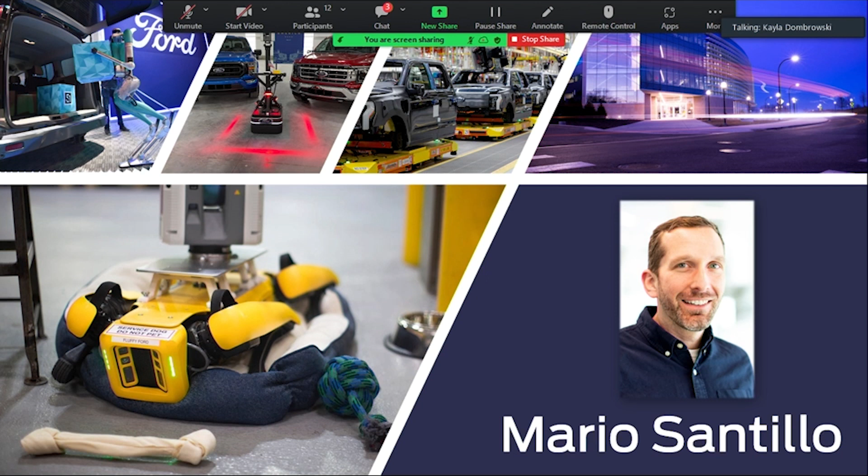All right, thanks everybody, and welcome, very happy to be here. So as was said, I'm Mario Santillo. I work for Ford Motor Company, and I actually lead a lot of their robotics research. I've been doing that for the last 4 years, but that's not at all how I got here, was not robotics.

When I was an undergraduate, I actually went to undergraduate at Rensselaer Polytechnic Institute, or RPI. If anybody knows, that's upstate New York, much smaller school than U of M. But I did aeronautical and mechanical engineering, because you couldn't actually have just an aeronautical or aerospace engineering degree at the time.

That actually led me to do some internships and co-ops with Boeing out in Southern California, where I learned a lot about spacecraft guidance, navigation, and control. That was really my first introduction to what controls is. I did 2 co-ops and 1 internship with Boeing over a series of several summers, and I realized I had no idea what I was doing there, but I figured I could actually do it really well anyway. It wasn't until the 3rd summer, after my senior year of undergrad and before I started here at U of M, that I realized how my teaching in undergrad actually led to what I was doing as essentially a full-time job at Boeing. That really led to a lifelong passion for controls.

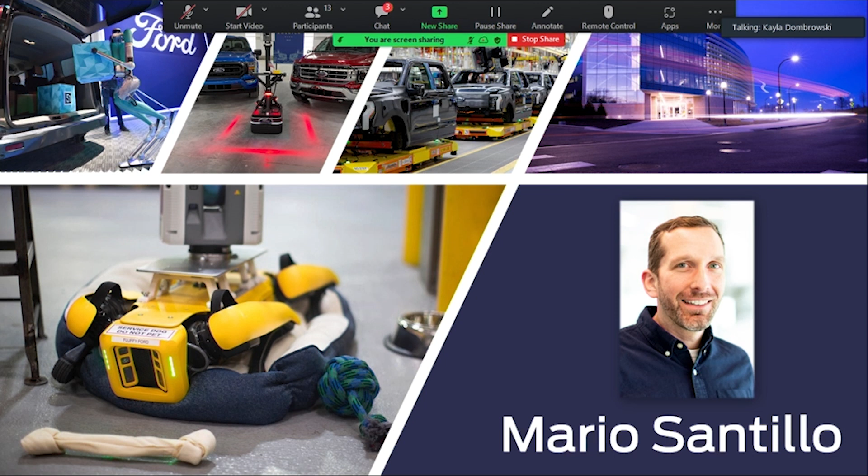This could be cameras and LiDARs and a bunch of other things, like ultrasonics and different types of cameras. And processing that data through a perception system to essentially understand the world we live in. And then we want to use that to achieve some objective.

We want to plan a path. Are we moving a robot, like a robotic arm, in many degrees of freedom? Are we moving a mobile robot? Do we have obstacles to avoid? How do we actually plan the path? And then the controls, which is where my original discipline was in, is how do we execute that, and how do we do it robustly and make sure the robot doesn't fall over and do weird things?

Obviously there's a huge interaction with human interaction. So human-robot interaction is a primary piece, because when we think about manufacturing facilities, it's great to have robots caged off, but they take up a lot of space and it's hard to reconfigure them. We want to get humans operating very closely with robots, and that means we need to really understand well what's around us, because robots could be extremely harmful if they met you in the wrong situation.

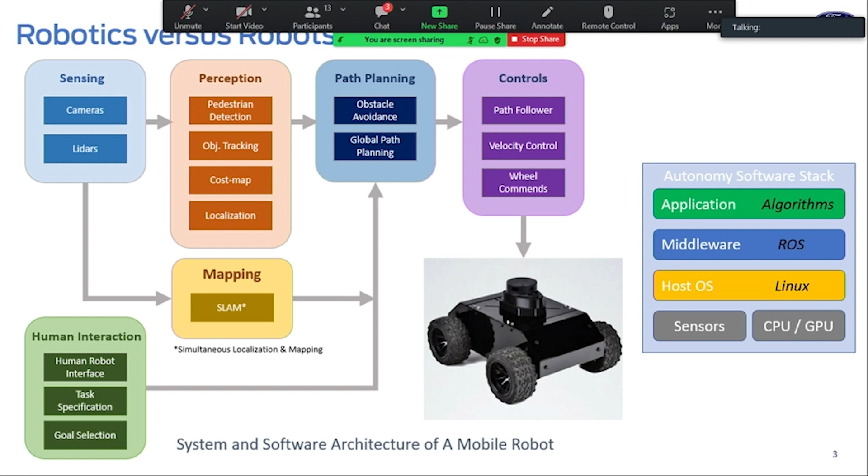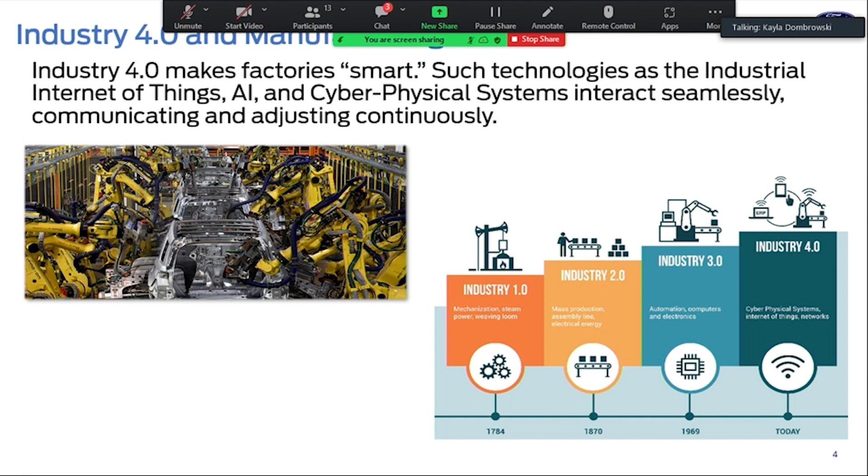So pivoting a little bit into manufacturing, I wanted to talk about what you may have heard called Industry 4.0. In the most basic sense, it's really just trying to make a factory smart. So they have this industrial Internet of Things, which is essentially just a smart word for a very expensive sensor, artificial intelligence, cyber physical systems - that's like augmented reality, virtual reality, digital twins of systems. And you want to get these all connected together.

So this is a huge system integration exercise, but the whole purpose is really this no-surprises manufacturing. In manufacturing, you don't want surprises because it costs downtime, and downtime costs a lot of money. Just a minute down in the manufacturing line could be tens of thousands of dollars of wasted profit. Clearly quality improvement - the more you get these things to self-monitor and then self-optimize, the more you can reduce all of these issues.

So a lot of what we're working on in the manufacturing space is towards not using the setup you see in the picture here. These are all robots that have no ability to sense anything around them. They're just pre-programmed to go to a very specific location and do a very specific task. It takes an immense amount of time to program all those joint angles. In fact, if you go into most manufacturing facilities and ask for the resident roboticist, he's the guy who knows how to program these robots - essentially programming joint angles and motions in a very specific open loop fashion.

And to put these things up and running can take months and months and months. There's a better way to do it, and it requires us becoming a lot smarter about how we program these robots and interact with them.

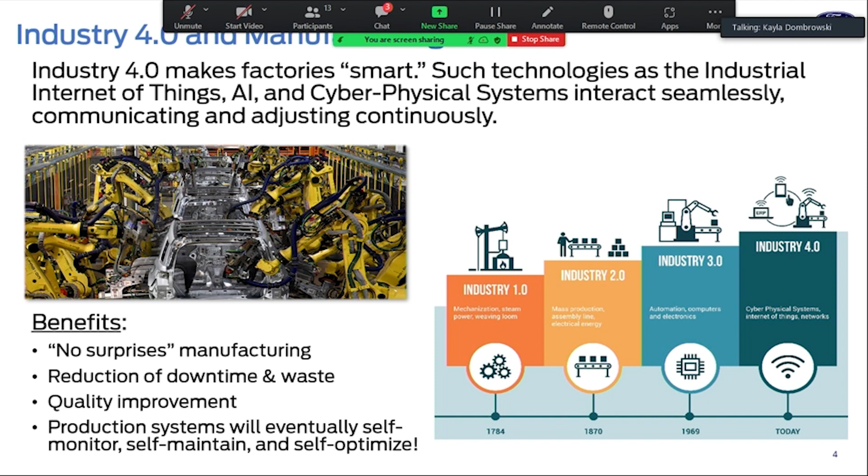And this is what we're hoping you bring up the next generation. So when somebody goes into a manufacturing facility in 10 years and says bring in the resident roboticist, it's not the same person that's doing this job. It's a totally different job. We can transform that entirely.

So manufacturing has come a long way, and I think process automation in general is really going to continue in a bunch of different areas in manufacturing. In fact, all different areas in manufacturing. I'm going to point out a couple different examples here.

This top right picture is supposed to be animated, but it's not animating right now. What it actually is, is an industrial robot that has some force and torque sensing on the end effector, and it's using machine learning methods to teach itself how to automatically install a torque converter into an automatic transmission. This is something we have running in our Livonia transmission plant just down the road here.

So that's nice because to install an automatic torque converter, it's a spline fit. You have to push down with a certain amount of pressure, turn it along some splines, hit another detent and it drops in, then you have to turn it again. It's not easy to do, and it's very difficult to have a robot learn to do it without breaking the thing. So using machine learning, we were able to teach the robot to do this effectively, and it really reduced the downtime and the waste of learning.

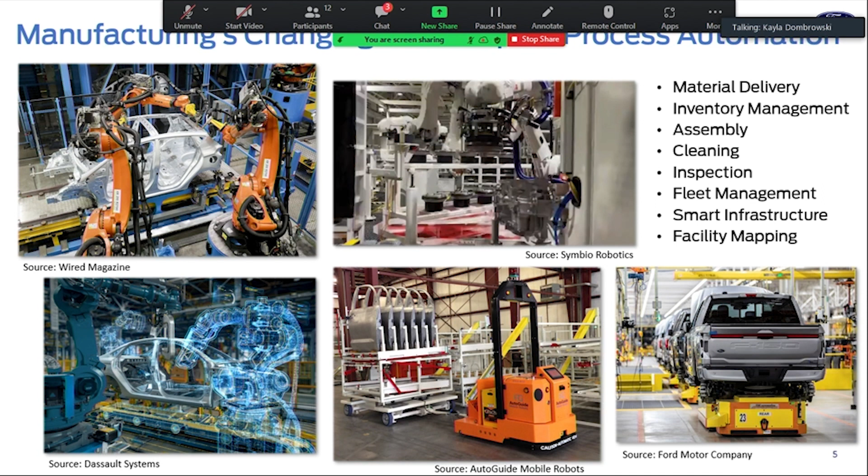Alternatively, we have these autonomous guided vehicles that we're using to build the F-150 Lightning. This is an actual shot of the plant here in Dearborn, as of probably late last year, where we had these vehicles going down the manufacturing line, sitting on top of these AGVs, we call them. And I mean, these things are massive vehicles. They can carry a ton of weight. We need to figure out how to make these things operate robustly, because any downtime here costs a lot of money. You can't afford for these things to not work well.

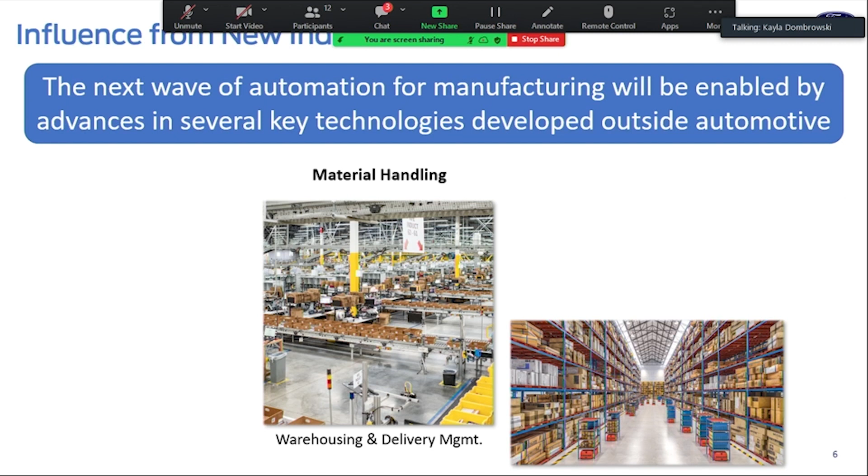So interestingly, what I found is the next wave of manufacturing automation is actually influenced by a bunch of advances in technologies that are completely outside of automotive. For example, material handling has really benefited from all this warehouse and delivery management - this is like an Amazon warehouse. But the necessity cropped up here immensely from online ordering businesses, right?

So these were all enabled by advances in a bunch of different technologies, right? Artificial intelligence, batteries, wireless communication, sensors, perception and control, open source software frameworks. I'm specifically referring to stuff like ROS and things we can download on GitHub and get up and running really quick. This is a totally different methodology than the way we used to think about things, where everything needed to be developed in-house, and if it wasn't in-house, it wasn't good enough. So really taking advantage of quick turnaround of software here is key. And all of these pieces here that I'm talking about are central to the things that you'll be learning in the robotics degree program. So all of this put together is really a huge push for robotics.

So I'm going to talk just a little bit about sensors and perception and control, because that's kind of where I come from. One thing when we think about robots - if you look at almost any of the robots that you're going to see in this building here, they are almost entirely self-smart. They're self-aware of the environment around them. And this is just like an autonomous vehicle. Any autonomous vehicle you see driving around here, they've got tons of sensors all over the vehicle.

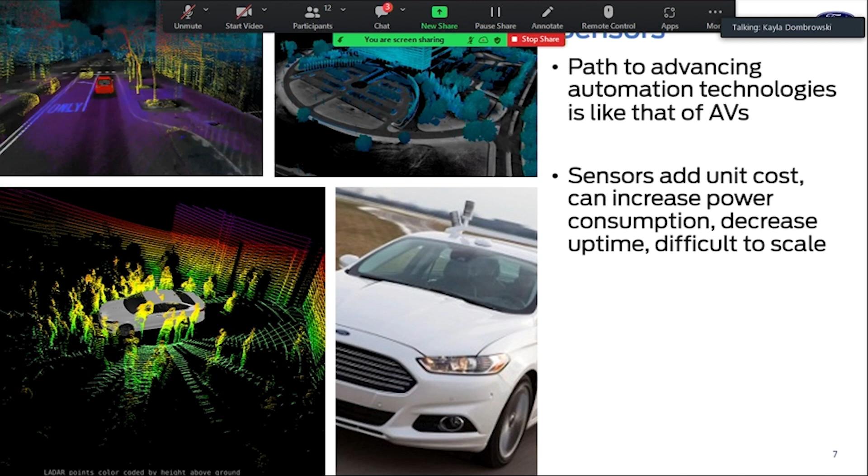And that actually leads to them being extremely expensive. They take a lot of compute power, which takes a lot of energy, and that reduces your uptime and adds a ton of cost. So where we actually see a lot of this robotics going, and where we're moving it forward, is offloading a lot of the compute and a lot of the sensing more to the infrastructure, essentially making the infrastructure smart, where we can utilize resources much more economically. But that's only a piece of the puzzle, right? So we can make these things a little bit cheaper, which means that we can do them at more scale, faster.

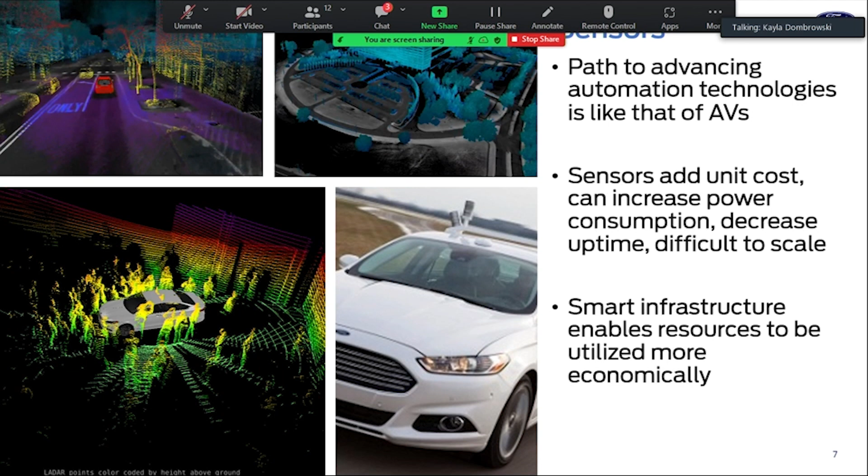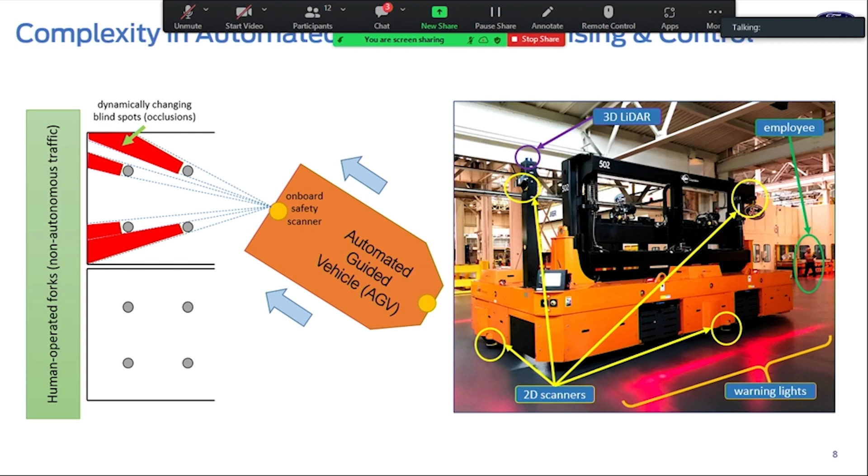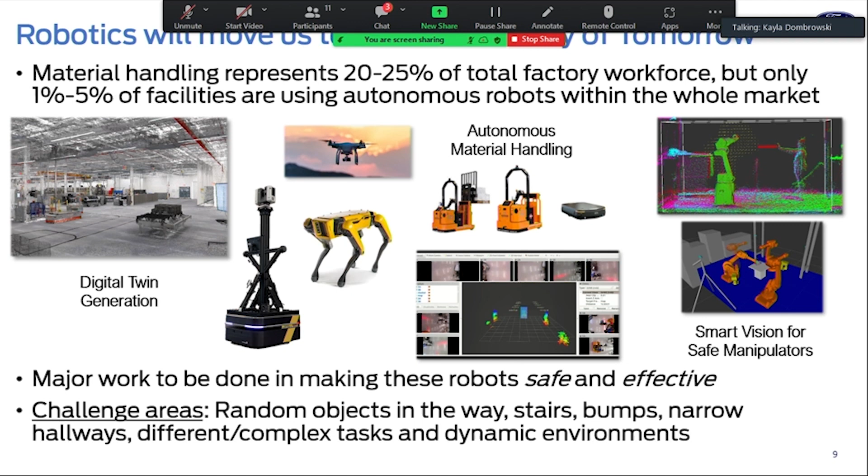Also along with this is perception and control algorithms. I've said these challenges are becoming increasingly complex. So we're at the algorithm layer, at the very high level of how do we make the algorithms do what we ultimately want. What I find is that the algorithms come from a variety of domains. At Ford, we don't have many people who are classically trained roboticists, but in the robotics group you have a lot of people with a controls background, people with a physics background, people with a computer science background, and you kind of mash it all together and figure out how to make it work.

Sometimes we don't all talk the same language and we have to come up to speed. So this is a fantastic opportunity to be able to come on common ground with language, and you guys will be a step ahead when it comes to solving these challenges in the future.

You'll see more and more industry is internalizing the expertise for the system integration, because ultimately robotics is a giant system that needs to be integrated and a lot of pieces need to come together. It's very, very difficult to do if you are pigeonholed into one very specific area.

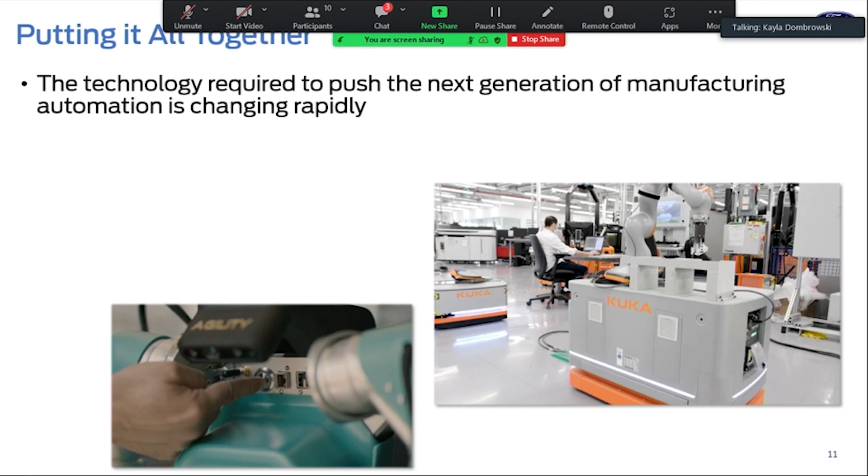Human-robot interaction, I mentioned at the beginning. Increased autonomy at increased speeds, right? If we can go slow, that's a really good starting point. That's a lot safer, but immediately you're going to want to increase that speed because you can get more throughput from it. Integrating AI - how do we integrate AI with a system where you have to guarantee safety when you have no idea how to explain what the output of the AI is? How do you integrate those really well?

Real-time feedback, tactile gripping. How do we do this in a generic way where we can grip objects without breaking them, but maybe they're heavy and maybe they're fragile? Very, very difficult to do in a generic way. And if you look around here, you'll find a lot of different professors in this building alone working on all of these different challenges. This is exactly what we're hoping to bring together.

So with that, I guess I'm done with the official presentation. There's two videos here which would be kind of cool to show. This agility video is essentially a promo video - you can actually find it on YouTube - but this was our demonstration of integrating this robot with an autonomous vehicle to be able to do fully autonomous end-to-end package delivery.

Up here is a little bit newer thing where we integrated this KUKA robot. So it's an autonomous mobile robot base, but it's also got a robotic arm on the top of it. It was integrated with our 3D printer system at the Advanced Manufacturing Center. This is actually the exact same place where you saw the high rendered 3D point cloud, where we designed this robot to be able to go up and tend to all of our 3D printers.

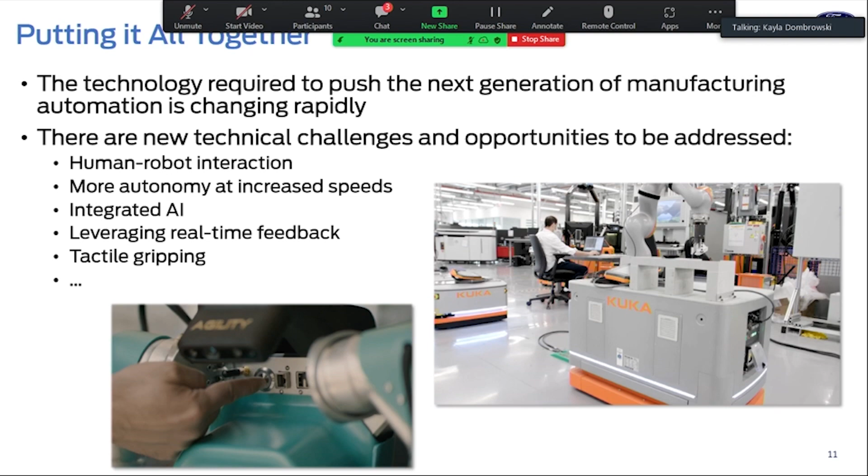Yeah, I will try here. Maybe not. Nope. It's all right. Well, let's thank our speaker.